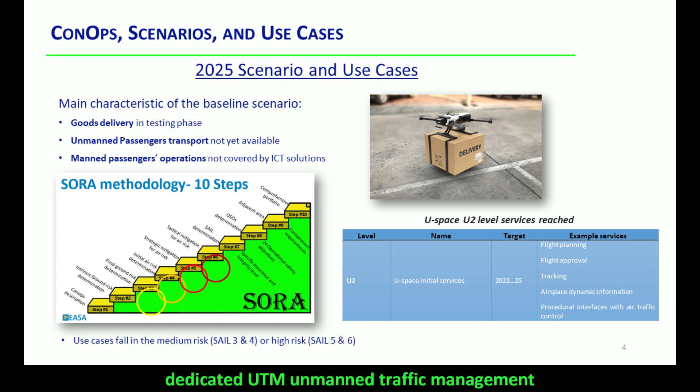This will occur with implementation of dedicated UTM unmanned traffic management services in the near future.

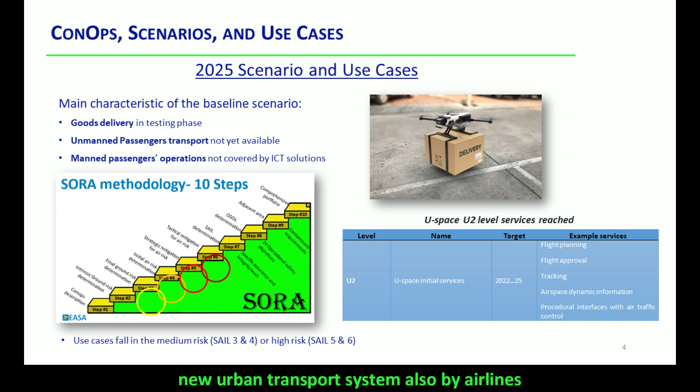The first UAM devoted air taxis, in service and only on demand, will likely not be a reality before 2025. Today, there is strong interest in this new urban transport system, also by airlines and airport management companies.

This interest exists because it could represent a new business line for them. The development of vertical takeoff and landing aircraft is at an advanced stage.

However, vertiports are needed, as well as infrastructures and management technologies, along with regulations that are still largely to be written.

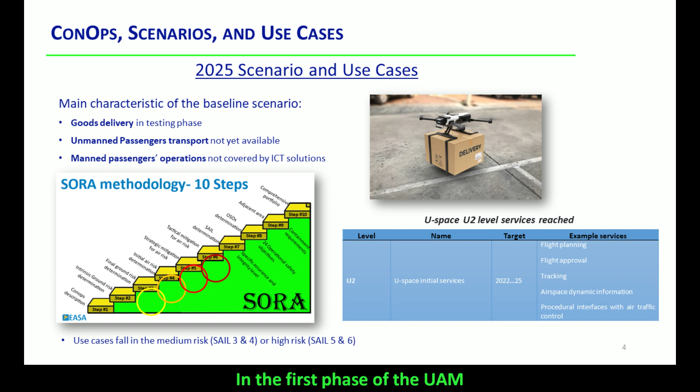In the first phase of UAM materialization, operations will be conducted with a human pilot on board the vehicle, before passing over time to full automation of the flight.

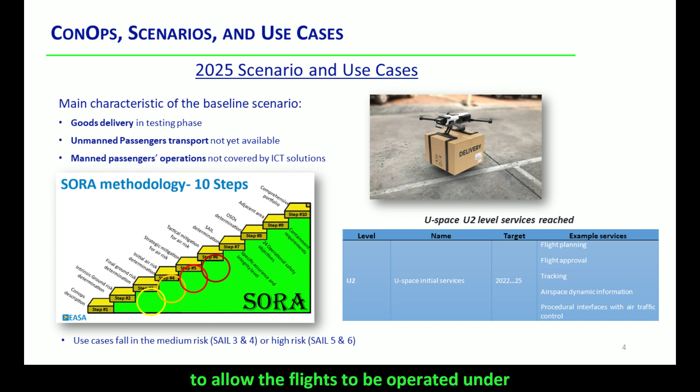Since these piloted operations are the first step, mainly aimed to gather information for larger scale or high-risk operations, mitigations can be applied to allow flights to be operated under the specific category.

For the intermediate scenario, 2030, it is expected that initial drone transport applications, active since 2025, will provide sufficient experience enabling launching of more complex types of operations.

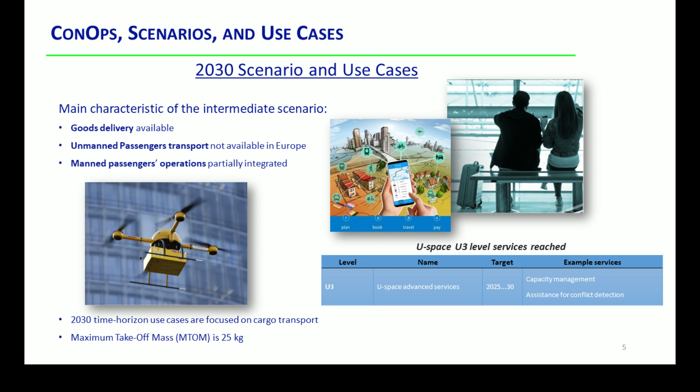Unmanned transport of passengers will not yet be available. However, it is predicted that the first VTOL aircraft will complete certification and be allowed to operate under regulations applicable for manned aviation, though not as regular operations, rather for demonstration of future possibilities.

Therefore, use cases allocated to the 2030 time horizon exclusively address cargo transport.

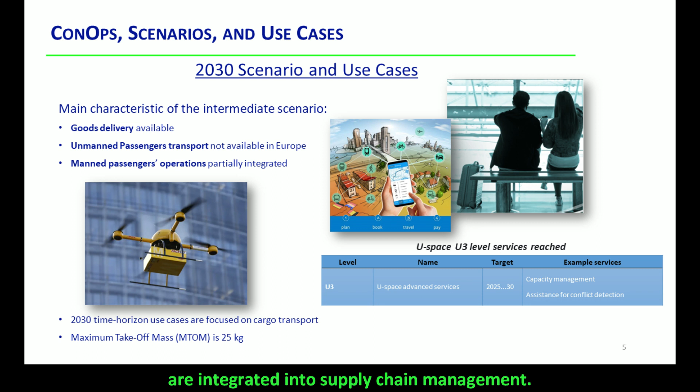In particular, cargo drone operations are integrated into supply chain management, with all functionalities available, e.g., shipment tracking indicating real drone position. Cargo operators' capacity increase is expected thanks to sustainability optimization, e.g., carbon footprint reduction.

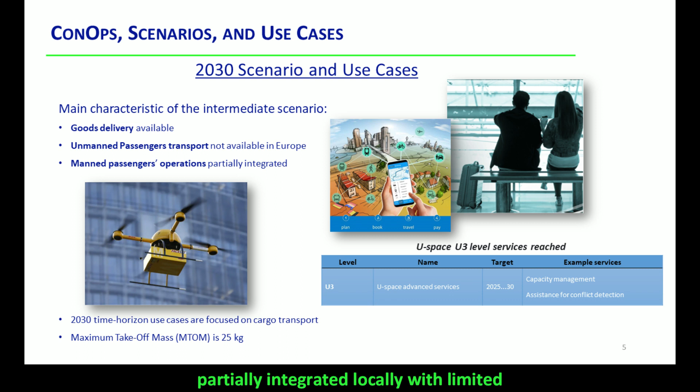For passenger transport, as anticipated, unmanned passenger transport will not be available in Europe. Only manned public passenger operations over densely populated areas, if available, will be partially integrated locally with limited modes on limited areas.

For the final scenario, 2035, it is expected that unmanned transport of goods will achieve the maturity level allowing for a more stable, though still increasing, market share.

This is also the earliest considered perspective for unmanned passenger operations to be allowed to or from urban areas in Europe, though still in limited and non-commercial manner as initial demonstration of feasibility.

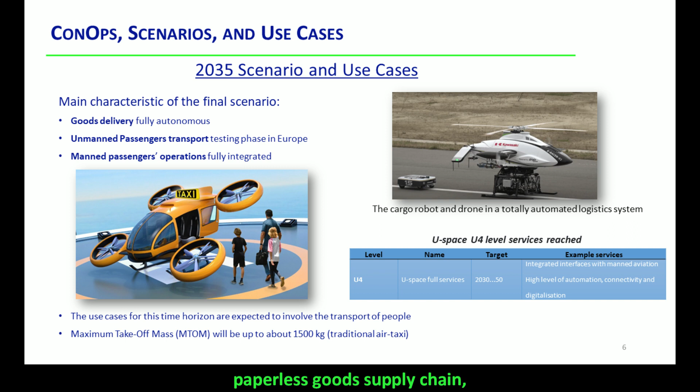Since the use cases for this time horizon involve transport of people, operations automatically fall within the certified category. For goods delivery, fully autonomous and paperless supply chain, automated warehousing and goods loading and unloading will be available.

Integration and digitalization of transport in densely populated metropolitan areas require cargo drones to operate solely between nodes, which are dedicated, secured ground infrastructures.

For passenger transport, autonomous passenger air transport is expected to be in testing phase in Europe, therefore not yet fully integrated. Manned public passenger operations over densely populated areas, if available, will be fully integrated locally.

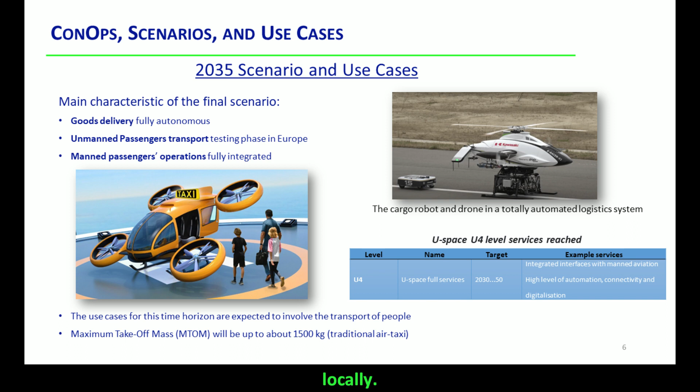In terms of use cases, ASSURED-UAM considered different private and public services. About private services, direct last mile delivery is expected to be operational in 2025, as commercially driven simple operation of local delivery of small and light parcels from defined distribution points to final destinations.

The advanced last mile delivery is expected in 2030, involving more complex logistics with the use of heavier carriers able to deliver more than one parcel during the same mission.

Automatic personal aerial transportation is finally foreseen in 2035, in terms of initial and demonstrative, not yet mature operations.

Regarding public services, point-to-point public services are expected to be operational in 2025, implementing high-priority public service-related tasks, realized in the framework of private-public partnership.

In 2030, point-to-everywhere public services are expected, allowing more complex and more demanding operations compared to point-to-point services.

Direct medical transport of people is finally expected in 2035, as testing operation of unmanned vertical transport of passengers and patients between hospitals.

In order for UAM to be integrated into the urban framework, several actions will be needed to adapt cities and allow them to accommodate this new mode of transport.

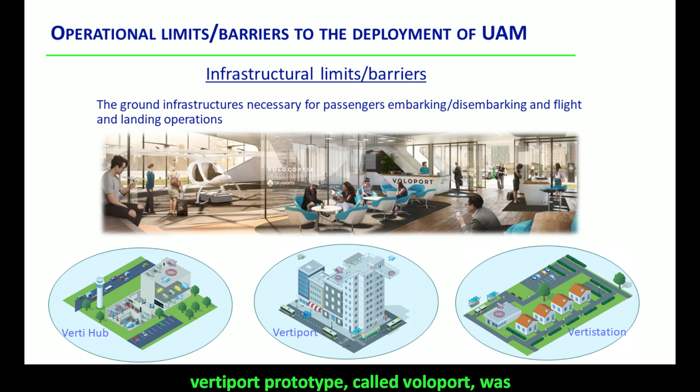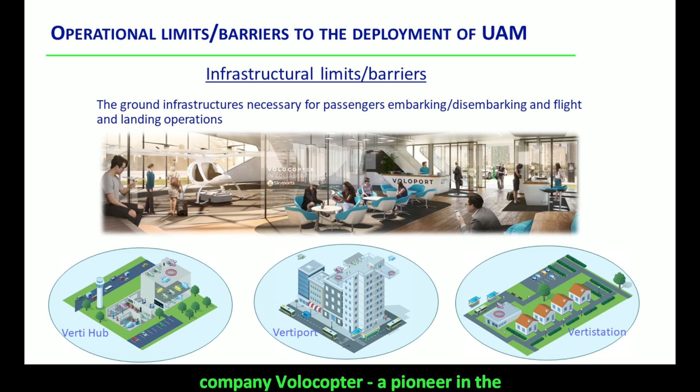For instance, the first vertiport prototype, called Voloport, was built in October 2019 in Singapore by the UK Skyports company in collaboration with the German company Volocopter, a pioneer in research and development of enabling technologies for UAM.

With respect to investment and regulations for infrastructure integration, the feasibility and cost-effectiveness of integrating UAM infrastructures into existing urban environments, buildings and networks could be a critical issue, emphasizing the relevance of point-to-point UAM application and integration with other modes for UAM development.

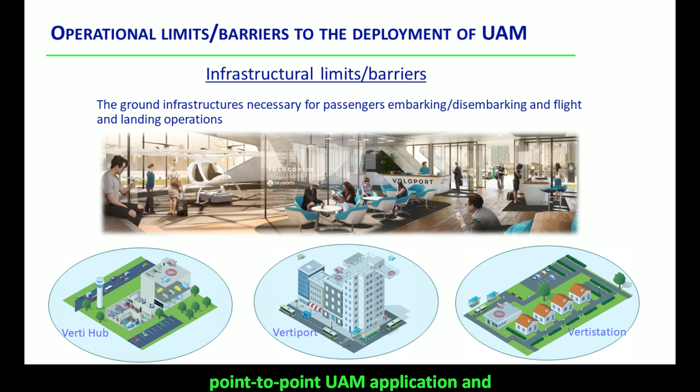Technological limits such as UAM vehicle characteristics, propulsion capacities, covered distance and so on, U-space services, city digitalization, and ICT, information and communication technology problems are fundamental.

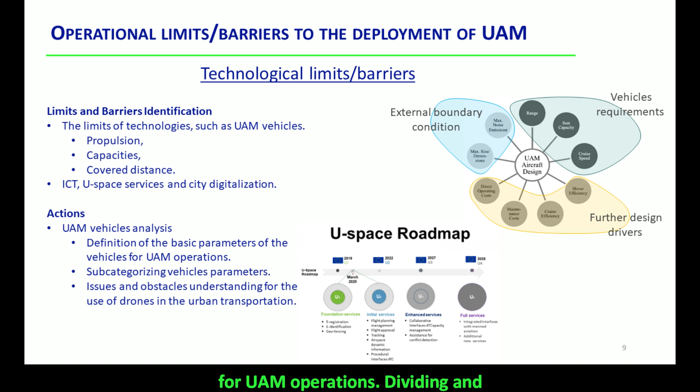Starting from the UAM vehicles analysis, it is important to define the basic parameters of the vehicles for UAM operations. Dividing and subcategorizing them enables a deeper understanding of issues and obstacles for the use of drones in urban transportation applications.

Huge efforts should focus primarily on the full automation concept. Indeed, as for the 4D contract, indicating a precise and negotiated scheduling of flights along with rigorous tracking of flight paths and times at each waypoint and inside assigned corridors.

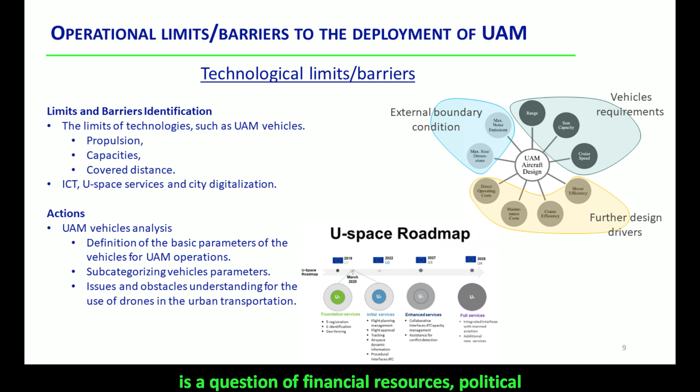The technology involved is relatively advanced. In fact, even though the underlying organizational strategy requires further work, a number of technological building blocks are already available. Thus, implementing the concept is only a question of financial resources, political will, and social acceptability.

Door-to-door mobility paradigm is nowadays considered for mobility in urban and peri-urban areas, as well as at overall European regional transport level. As also analysed in the X-Team D2D door-to-door project, this paradigm offers new passenger-oriented perspectives, such as mobility as a service, an innovative approach to mobility management, integrating into a single framework all modes of transport, both private and public.

These modes are available in a city, offering the user the possibility of planning, reserving, and paying for the intended trip by using only one personalized application and ticket.

These new paradigms obviously need the sharing of information between the various transport systems. For example, the weather information exchange models and schema is a system designed to enable platform-independent, harmonized, and interoperable meteorological information exchange covering all the needs of the air transport industry. The specifications of such a system support the data-centric environment, supporting information collection, dissemination, and transformation throughout the data chain.

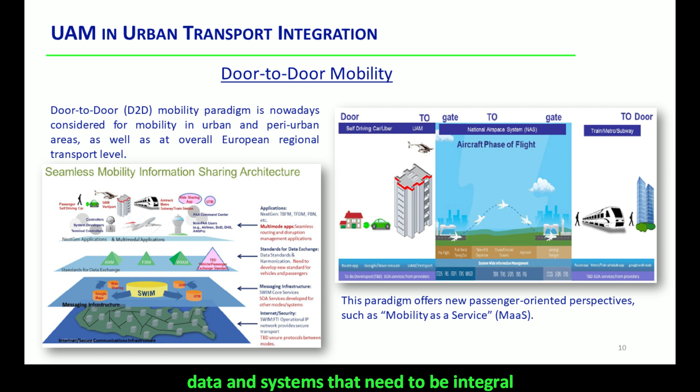This is only one example of the multiple data and systems that need to be integrated to allow the targeted mobility paradigm shift.

Integrating the different transport systems will enable effective disruptions management, as different modes of transport offer alternatives for conducting the initial planned journey. These alternatives increase the flexibility needed for robust disruptions management.

UAM deployment has one of its main motivations in its potential to circumvent congestion on the ground due to surface transportation capacity saturation. In this way, UAM represents a new possible leg of an integrated seamless journey, allowing multimodal possibilities, as considered in the X-Team D2D project which collaborated with ASSURED-UAM.

Effective disruptions management will be enabled by evaluating and sharing impacts of disruptions across different mobility means. The shared repositories coming from different mobility means will enable information sharing, allowing data fusion, mining, and analysis. This will positively impact mobility performance metrics, enabling increased levels of D2D mobility integration.

The end users will exploit this information for real-time decision-making, switching between alternative available mobility modes to complete their journey. Thus, the system will be resilient to disruptions, offering several modes of transport alternatives to conduct the integrated unique D2D trip.

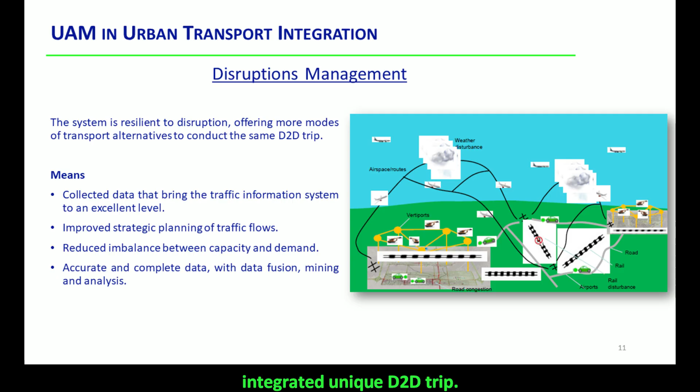In UAM, dedicated air, also named vertical, traffic management is obviously needed to coordinate flight operations in the urban airspace. This encompasses not only technological aspects, but also regulatory ones, as well as policy governance.

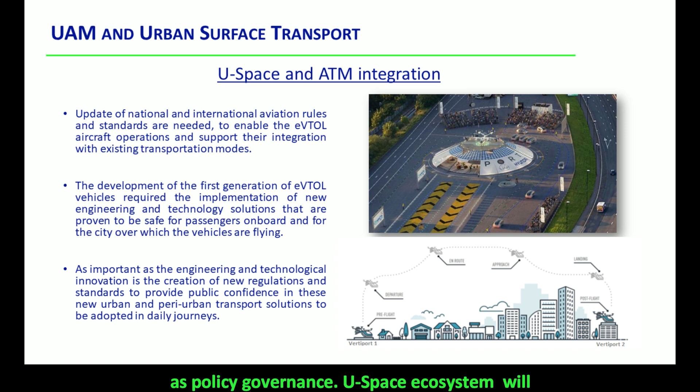U-Space ecosystem will gradually provide the whole set of services needed to allow integration and coexistence of both general aviation and UAM operations with the proper level of safety, typical of aeronautical operations.

Thus, updates of national and international aviation rules and standards are needed to enable the UAM vehicles' safe flight and to support their safe integration with existing transportation modes.

The development of UAM vehicles required the implementation of new engineering and technology solutions that are proven to be safe for passengers on board and for the city over which the vehicles are flying.

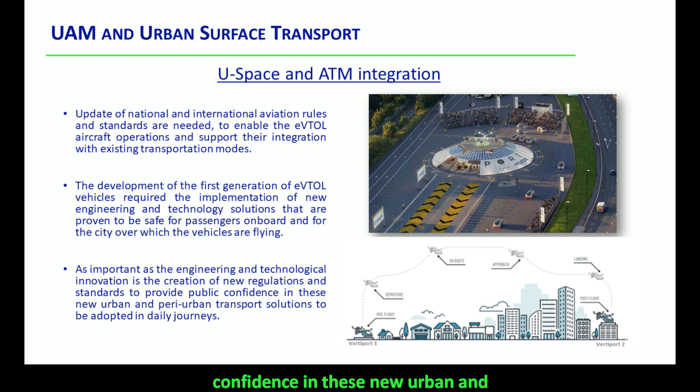As important as the technological innovation is the creation of regulations and standards to provide public confidence in these new urban and peri-urban transport solutions to be adopted in daily journeys.

Scenario is a tool for imagining future. In transport systems theory, it is typically applied for designing or redesigning and planning. Scenarios are generated by different assumptions on exogenous variables or represent subsequent system states after changes application.

We assumed the present system uses the 2021 transport infrastructure in considered cities and modes available today, as well as these gaining popularity. As a project system, we assumed the services as defined in the use cases on top of the present system. We distributed forecast scenarios along time horizons and EU transport strategies.

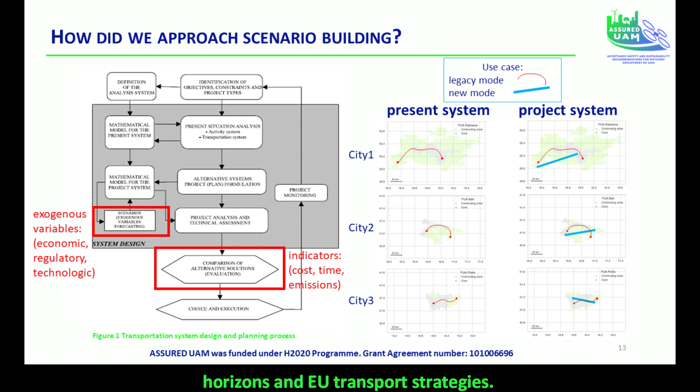Our model is most probable. We chose central values of the forecasted exogenous variables and represents a mixed method: a qualitative analysis of future and a quantitative spatio-temporal static representation.

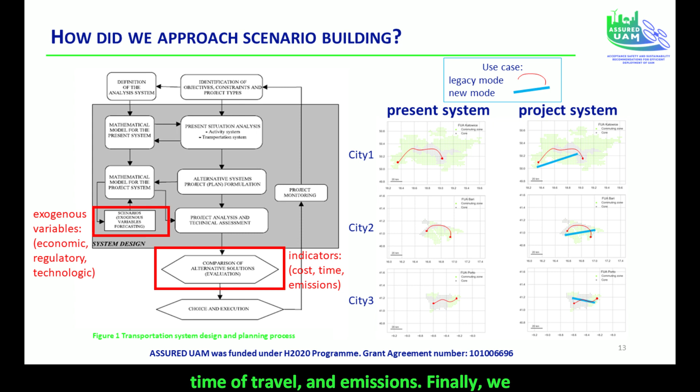We selected probable itineraries addressing the use cases and calculated their indicators: costs, time of travel, and emissions. Finally, we identified how many UAM operations are needed for UAM cost competitiveness.

Our scenarios are based on the following exogenous variables: inflation, wages, currency exchange rates, oil prices, electricity prices, its generation emissions and sustainability expectations. There are risks related to inflation and controversies in Poland over EU funds and policies.

Although inflation in Italy and Portugal is also expected to increase due to energy prices, the effect is not as strong as in Poland, and it will be offset by strengthening of the euro against the US dollar and other currencies. This will not be the case for Poland, as it is not yet part of the Eurozone.

As a result, wages increase will be much more offset in Poland by inflationary growth of costs than in other considered countries.

Mobility efficiency has been traditionally driven by oil and gas prices. Oil will continue to play an important but diminishing role in certain niches of transport like long-range delivery or military logistics and vehicles. The reference scenario of Brent oil prices reported by the US Energy Information Administration typically assumes more or less intensive price increase.

On the other hand, other energy sources' role, in particular available as electricity or green hydrogen, grows substantially. Renewables, bioenergy, geothermal, hydropower, ocean, solar, wind, as signalized by the International Renewable Energy Agency, will be a significant source of energy by the year 2030, if not before.

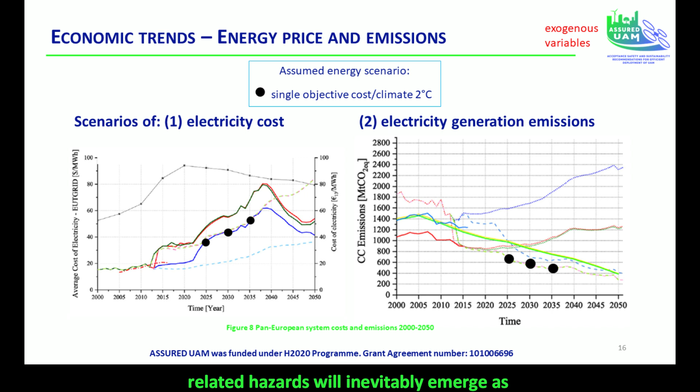Even if we do nothing, the costs will gradually increase anyway, but the risks of climate-related chronic and acute temperature, wind, water and solid mass-related hazards will inevitably emerge as defined by the EU taxonomy.

The EU taxonomy for sustainable activities follows the do-no-significant-harm principle. The renewable sources of energy, including wind, sun and hydro, together with fossil gas and nuclear reaction, according to the taxonomy, are to play the main decarbonisation role in mobility.

Fair approach to compare modes of transport requires considering emissions of the whole life cycle, including beyond direct operating emissions of vehicle, which means investigating other aspects including local energy mix represented by global warming potential of electricity generation by country. Italy is converging towards net zero emission, having a substantial component of wind and sun as a source.

The status in Portugal is quite uncertain, yet it is much better than in Poland, which mainly uses coal and lignite, and, as it seems, it will continue to do so.

Urban logistics is under great transformation and has many challenges ahead. Private citizens, companies and public institutions could benefit in the future from UAM cargo services according to patterns shaped by future business models, organizational culture for business-to-business case, citizens' lifestyle and social changes for what concerns the home or close-to-home delivery to private citizens. UAM passengers will correspond to an enlarged group of current air taxi business passengers.

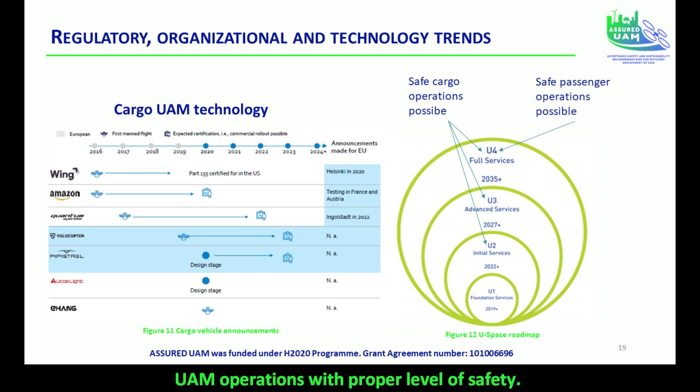The near-term step is enabling a set of services foreseen in the U2 level, i.e., planning a flight mission, its approval, tracking of drone movements and interaction with air traffic control. Only full services of U-Space will enable safe passenger flights.

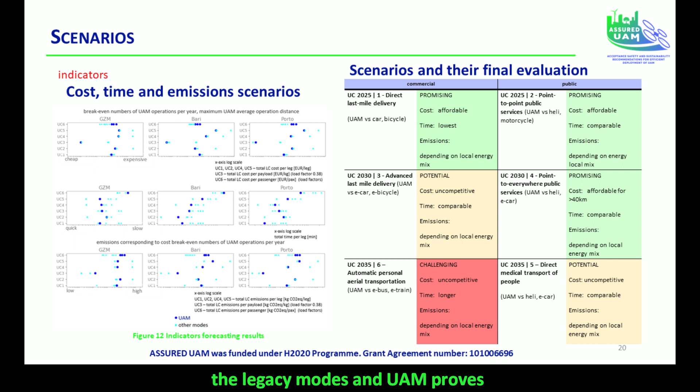The indicators comparison between the legacy modes and UAM proves attractiveness of UAM in certain niches. UAM has a potential to be cost competitive with lower or comparable time of travel in comparison to the most possible other modes in urban delivery business and public emergency deliveries.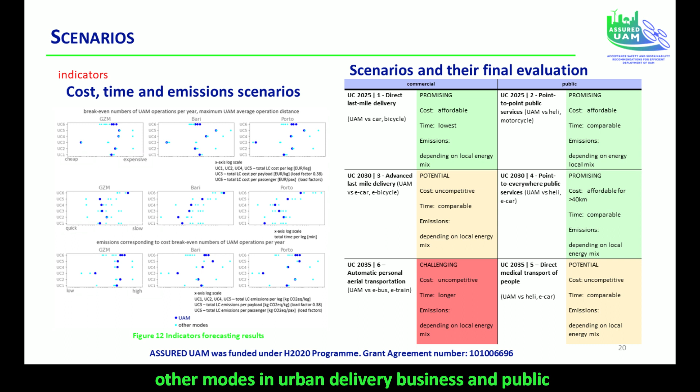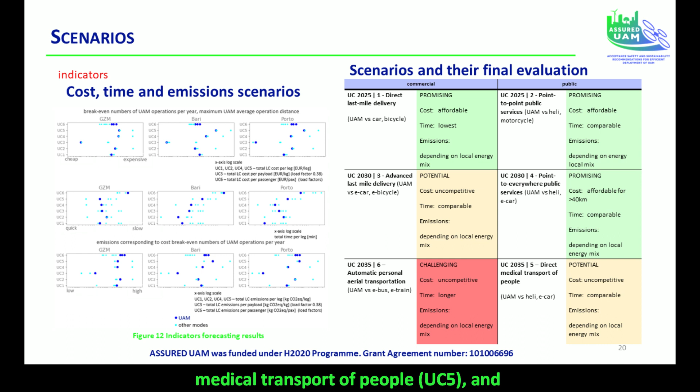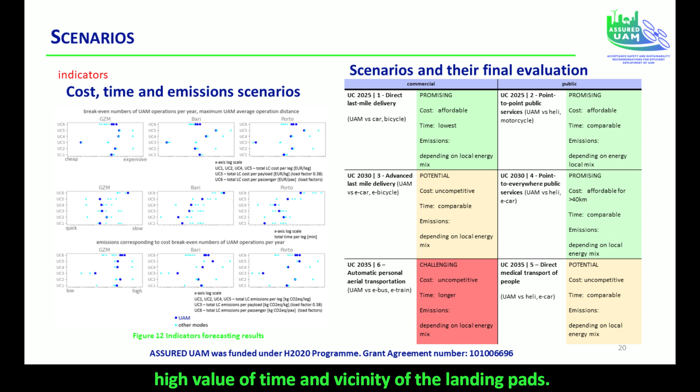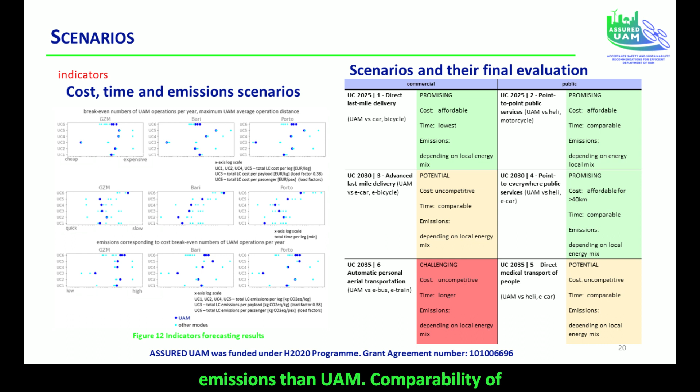With fossil fuels as a source of energy, only helicopter generates more emissions than UAM. Comparability of exposure, i.e. common denominator, is critical in emissions calculation.

If we relax this rule, and we assume better load factor for UAM, its emissions will be close to electric bike, but still not as good as those of electric car, with a humble load factor of 0.38, but a large trunk. The obvious is, one needs less energy to roll than to float.